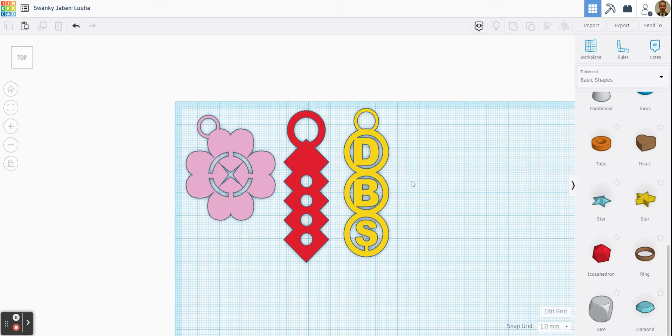So as you can see, I've got three designs that I've created. They're all very different. This one actually uses hearts, which can be found here. I've copied it and rotated it around, joined it together. This one uses the cube, the box here - again I've just changed the shape and rotated it. And this one uses circles, which is the tube here, and I've joined those together.

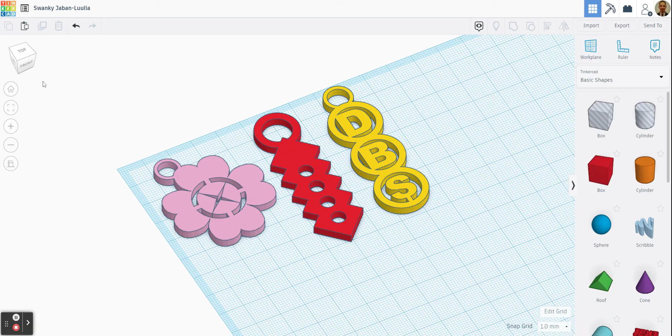And I've also, with this one, gone into a different menu in here, text and numbers, and found some letters that I can use. So before we get started, I'm just going to cover a couple of really important points when we are creating our keyring.

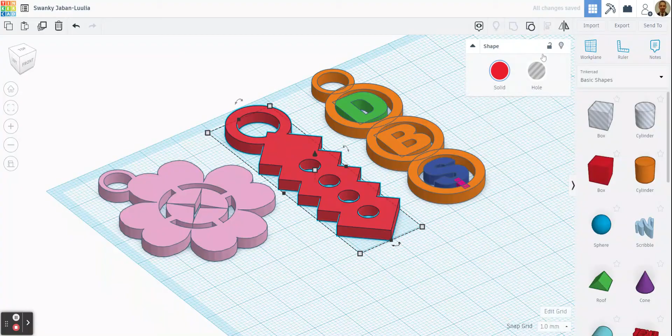The first point is that if you look, everything is the same level. What I mean by that - let's say if I just click this one and ungroup it, and ungroup it again, you can see all the parts to the keyring. Let's just hide these so we don't get distracted. You can see all the parts of the keyring, so I've got my D here - if I just drop that back, and all the letters as well.

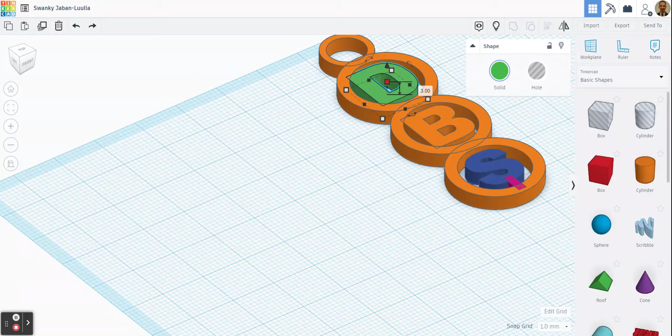Now the important thing is everything is the same level. So for example, if I just raise this up a little bit, this is 3mm, you can see by the number 3 there. If I raise that a little bit, and zoom in, you can see we have this area here that's lifted up.

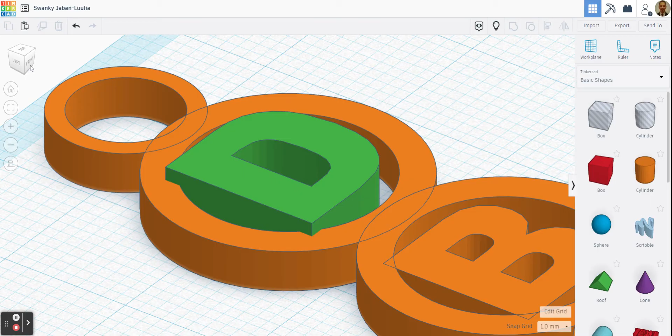Now that is really important because if your designs are left like this, with this raised area, when we send it to the laser cutter, it will see that as an edge from the top. The laser beam will come down here, and come down here, and cut out here, going all the way across. What will happen is your D will fall out.

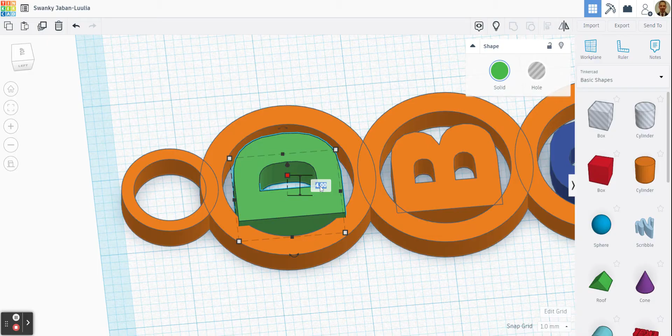Now I want to show you the difference. So if I put that to 3, which is the same level as the orange circle it's in, now when we look - I call this glitching. When it's the same level, you get this little glitch, like it's glitching. That's a really important thing to look for when designing to laser cut - it means it's on the same level.

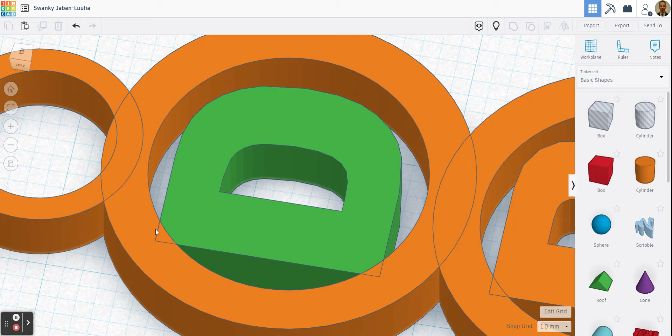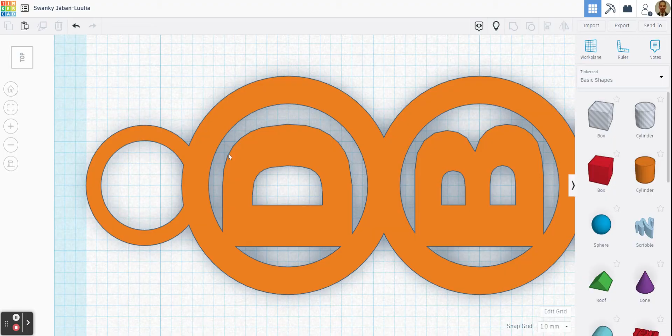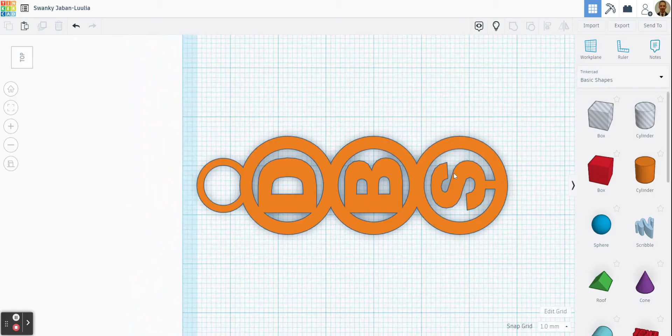When it's on the same level, when you come to merge it all together - we've done this in the previous lesson using the group tool - you'll notice that from the top, if the laser beam came down here, it'll stop there and go back up. This would mean your letter D would stay in the right place because it's attached to this circular ring here. If you look at all this, imagine the laser beam going around all these parts, and you'll be left with the letters in the correct place.

So let's bring everything else back and show that on everything else as well. If we have a quick look at the pink hearts - imagine the laser beam cutting the outside shape, and you can see that everything here would be kept together.

Now this one's quite interesting because when I created this, if I undo it, you can see I had to add these red pieces. Because if I didn't add those red pieces, since these are separate pieces - again you can see it's glitching, meaning it's the same level - if these red pieces weren't here and it laser cut it, I would be left with a hole in the middle; this middle piece would have fallen out. So I had to create these little pieces to attach the middle to the outside.

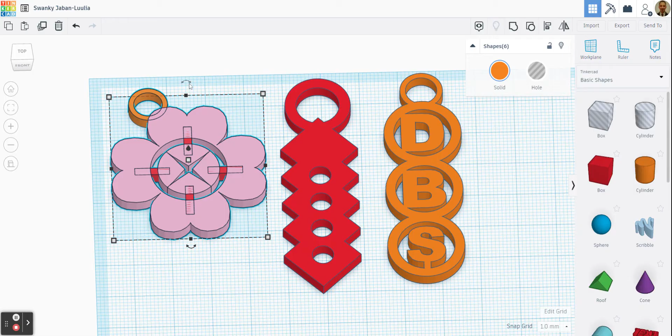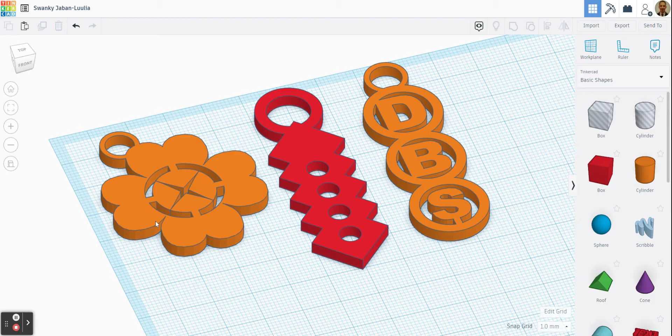But I'll cover that more in the demonstration I'm going to do next. So there's some important points you need to look at. Now another important thing is to make sure your total height for these keyrings is 3mm. So all these, if I click this, it's 3, 3, and 3. The reason why it's 3 is because the plastic called acrylic that you'll be cutting is 3mm thickness, so this is exactly to scale as you would be doing it in real life.

Another thing to take note of is when I zoom in like this full screen, it looks really big. When I zoom out, they look smaller. Now, what you need to do is count the squares. Here I can see 1, 2, 3, 4, 5, 6, 7.

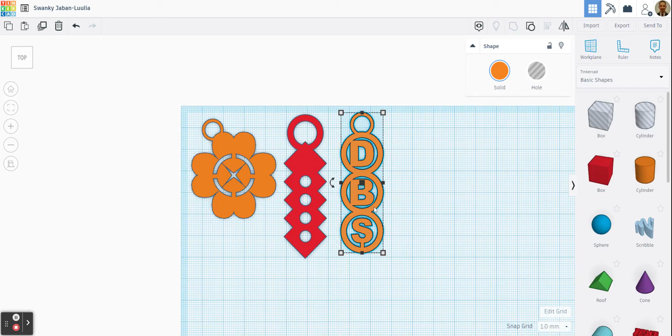So each of these squares is a centimetre. So this keyring is 7 centimetres long by, I would say, maybe 2 centimetres wide. If I move it to there, you can see it's two boxes, 1, 2. So you need to keep an eye on how big and how small things are. It's very easy in Tinkercad to create things that you think look big on the screen, but when you actually laser cut it, it is very small.

What you can do if you want to make things bigger or smaller is you can click this button here, and you can increase this. So it's 6.5 centimeters high, and it is 2 centimeters wide, so it's 20 millimeters. If I was to make that double the size, if I was to make it 40 wide, I'll just click that and type in 40, like that. And then of course that changed the proportion. It doesn't look as good now, so just undo that.

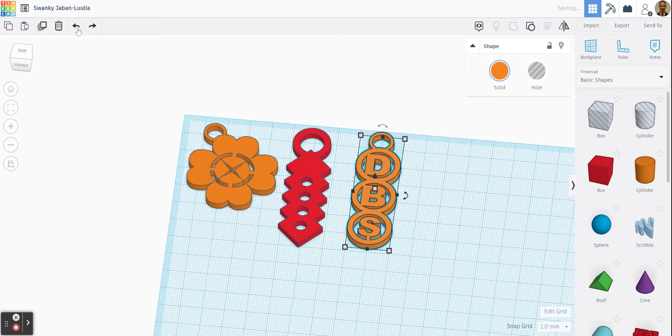So again, when you are designing your keyring, please make sure you take note of how big things are. You know how big a keyring should be. If you are unsure, just grab your ruler, have a look at it, and then work out what is the ideal size that you think.

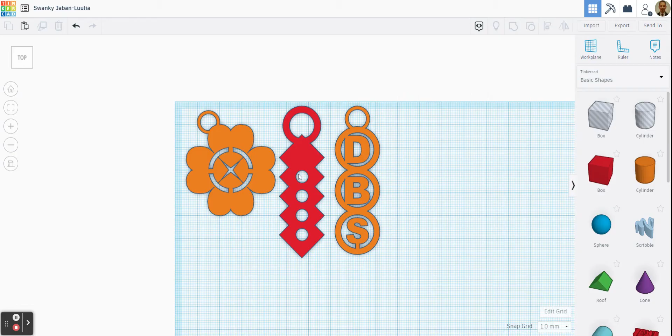Right, what we'll do is we'll show you how we create this one, the red one in the middle, and then we'll show you some other techniques to possibly help you create the other ones.

So if I want to create this one, the first thing I do is bring in the box. Now, when you're creating your keyring, only use shapes that have flat tops. So things like the box, the cylinder, don't use the sphere, don't use the cone, don't use the rounded roof, don't use a half sphere. Polygon's good. Don't use a torus, tube, heart, star, don't use this star, only flat tops, don't use this ring.

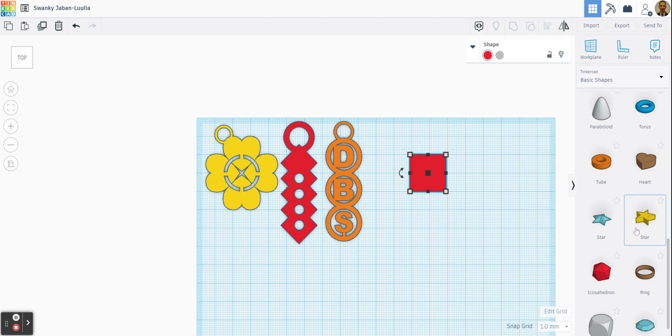If we were 3D printing, these would be fine, but because laser cutting only cuts things in 2 dimensions, it means it can only cut surfaces that are flat on the top. So don't be tempted to use this star and expect your keyring to look like that, because we're going to put a flat piece of plastic in the laser cutter and you will not get this. If we were 3D printing it, it would print to this shape. So just be mindful of that as well. Only use shapes with a flat top.

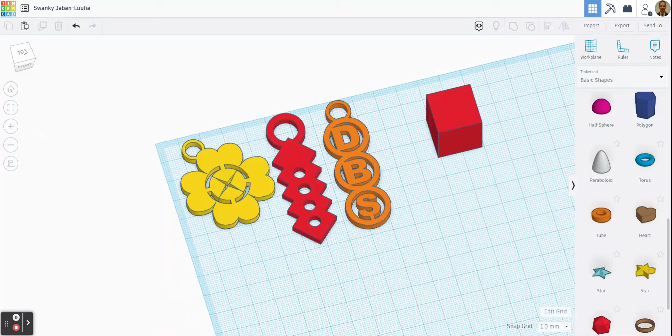All right, first thing I'm going to do is go into a view that you guys will be in when you start. The best thing to do, I would say, to begin with is go to the top view, like that, and then click this button here. So work in this view. Top, and then click this.

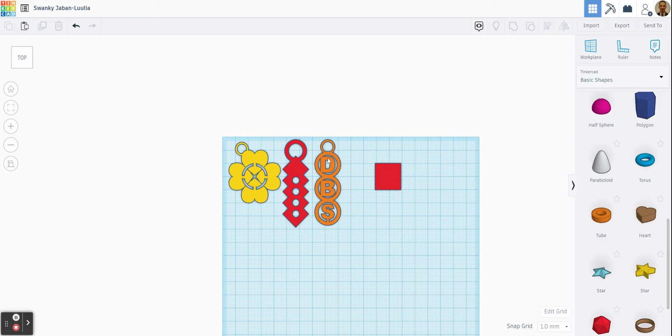Then you need to start looking at your shape. For this one, what I did was I made it a little bit smaller. To do that, the easiest way is to hold down the shift key and pull the corner in. The reason why I hold the shift key, if I don't, I can do this. If I hold the shift key, it keeps in proportion, like that. Now, another point is that when I make things smaller, it also alters the height. So once you made it to the right size, you have to do this visually. That looks fine to me.

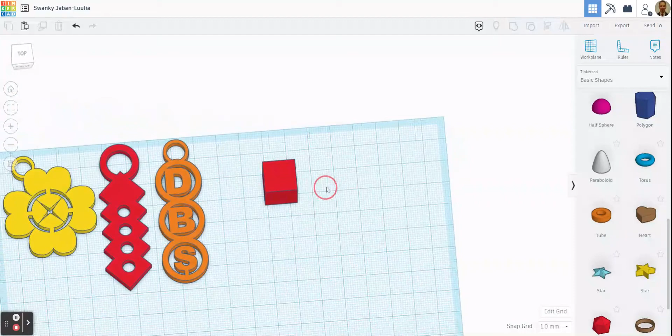Just go into the 3D view. So turn your view like this, click it, and then change the height to 3 millimeters. Then you know that's the correct height. And you can go back to your top view.

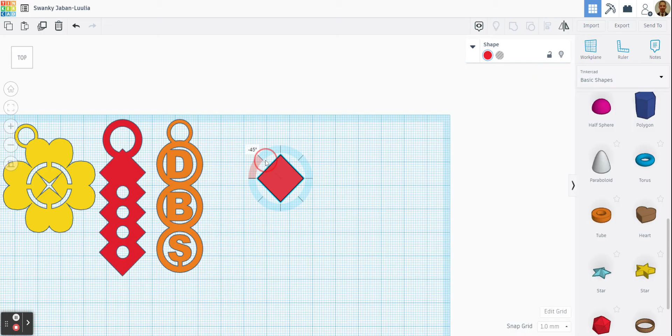Now what you do is you can get this and rotate it. Again, the rotate tool gives you quite free movement. But if you hold the shift key, it locks into 45, 90, etc. So this is a lot easier to use because it gives you nice presets. I want that sort of diamond shape, so I'm going to move it 45 degrees, then I'll let go.

So now I want to create another one. To do that, all I do is go up to here and press duplicate. Remember from the previous video that when you duplicate something, it appears on top. So all you have to do is press the down arrow key to make it appear.

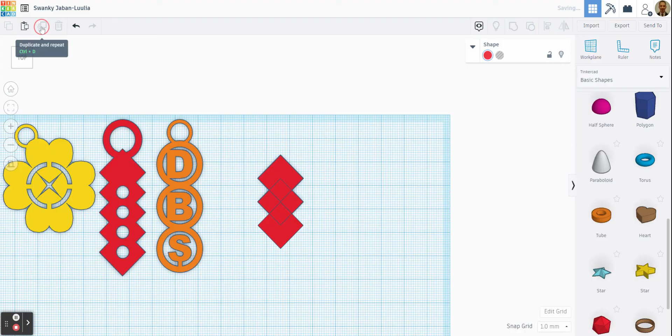Now what's nice about this is you find where you want to have it, maybe there. Then if you press duplicate again without deselecting this, just leave that selected. If you press duplicate, it'll repeat it in the same place. So you can create quite a nice pattern if you wanted to, like that.

So let's put 4 in. Okay, now I've got this pattern here. What I'm going to do is I'm going to just click them all, and then I'm going to group them. So now it is one shape.

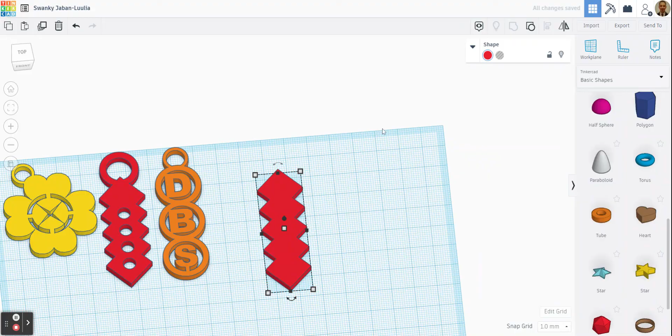From there, what you could do, you could click this, press duplicate again, and rotate it. You could say, right, I want to rotate that, and then let go. From that, you've got a really interesting shape. So you can see that from a box, tilting it, copying it, then rotating it, you've got an interesting shape. So this looks cool to me.

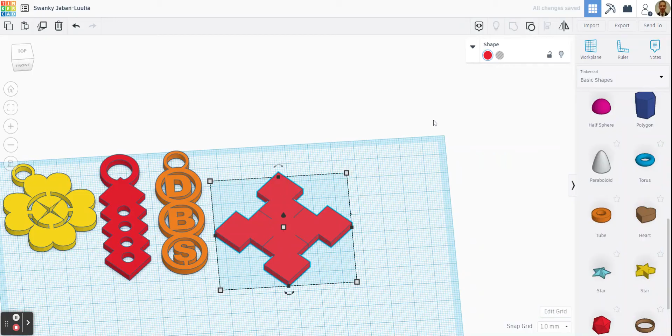So I'm going to again get that and group it to get rid of the lines. Okay, so now that is fine. I've got these little lines here, but I think they're okay because they might be like a nice design feature. So that's looking okay, looks interesting.

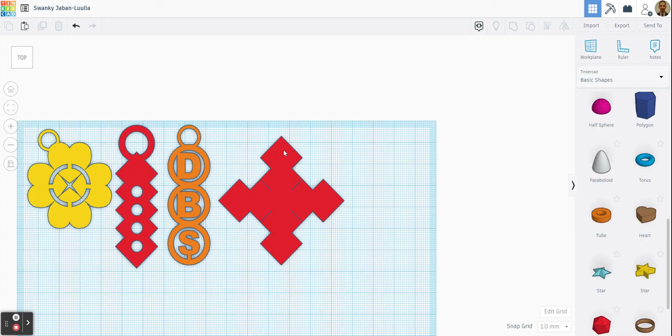So what I'm going to do now is I'm going to put some features on here. I'm going to take some shapes away from this shape to make it look interesting. So I think what we'll do to begin with is maybe put some circles, take some circles away.

So I'm going to get the cylinder. What I'm going to do is, when I always get the cylinder, I click this and I increase the sides to make it a perfect circle. Then I'm going to resize, so again I'm going to hold down the shift key and make it smaller. Okay, that looks good to me.

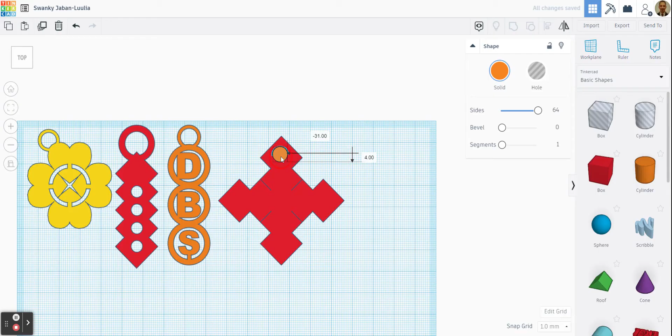And I'm going to put this one on top of here. Now, what I want to do is I want to get this in the center of my shape. Now I can do it by eye, but it's a little bit awkward. So what I'm going to do is I'm going to just highlight my shape.

And then I'm going to press this button here, align. Now align's really good, it's really useful, because if I want to align this circle through the center, I just click this black dot. And now I can see it's in the center. So this point here will be the center of here. So it aligns nicely. If I click that, it'll put it right in the center, but I don't want to do that.

Okay, I want to have it back where it was, which was there. So we've got that in the right place.

Just check it's aligned. So what I want to do is I want to again duplicate that, and I want to use my down arrow key to put it on the opposite side, roughly about the same place. Okay, and then what I will do is I want these two to be also there and there.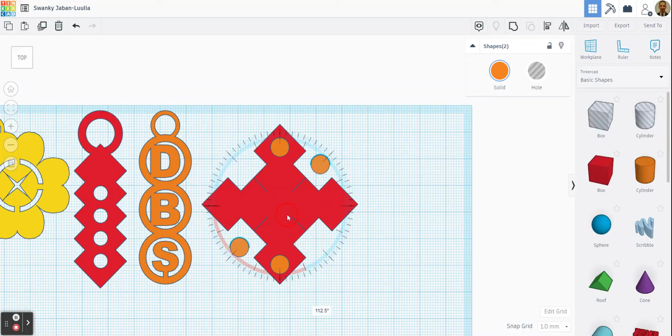So I click this one, I hold down the shift key and click the other one. So that's both things selected now. I then press duplicate, and then if I use the rotate tool, it should allow me to rotate it by 90 degrees. So they are now in the right place.

Now I want to take them away, and currently as they stand, if I do that, I can see that they won't be taken away, they'll be added. So I want to take these away, so I'm going to click that one, hold down shift, click that one, still holding shift, click that one.

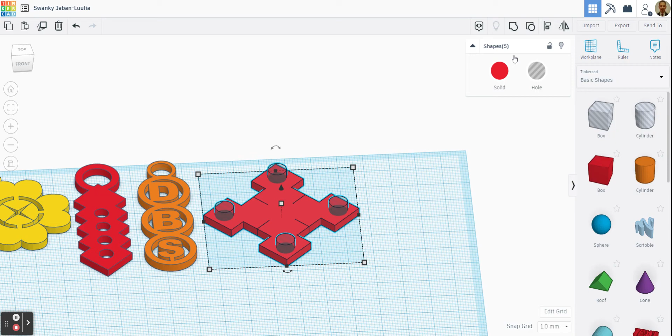Okay, so then I'm going to change them to a hole. All right, now they're all ready. And the last thing then is to do this and then to take it away. So then we get a hole taken out of there. So it's looking interesting now.

So in this center area, I think I'm going to take something away as well, just to add a bit more feature. Anything interesting down here? No, I think I might just use the cylinder like this. Okay, and again, like I said before, increase the sides.

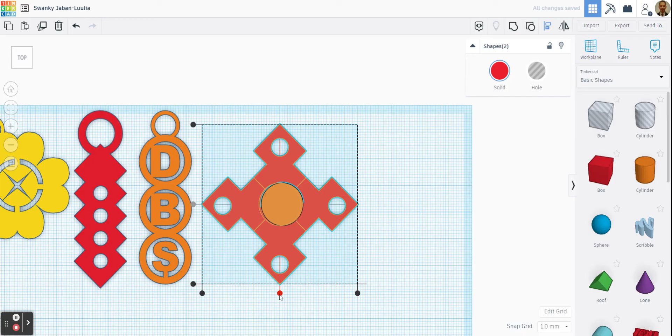And I'm going to put this in the center. Same as before, I can put it sort of randomly where I want to put it. Okay, then if I highlight this and use my align tool, if I click this left dot, it hasn't moved because it's already in the right place. And if I click this one, it'll move slightly, so that now is perfectly in the center.

Okay, so again I want to remove it, so I click it, I press the hole. Then I have to select both things, and then we take them away.

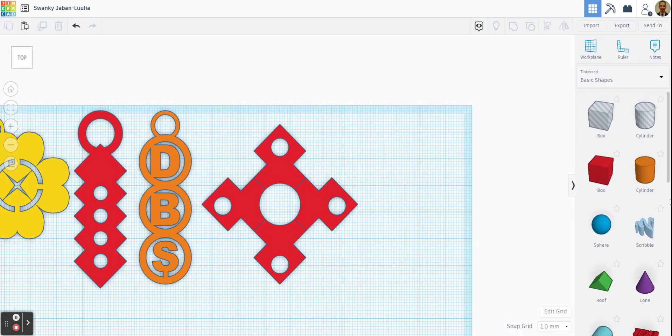Okay, so now we have our hole in the middle, that's my interesting shape. What I could do is put something inside there, so let's go for text and numbers, let's go for my initial R.

Okay, and I want to put this R in the middle here. Now this R has to touch on the sides, it can't just float in the middle like this, because when we laser cut it, you will lose your letter.

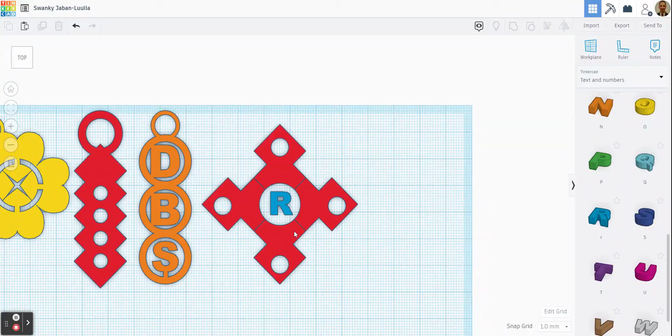So there's a couple of ways we can do this. Let's zoom into it, click this and have a look closer to make life easier. Okay, so get really accurate here. So I could grab it and hold down Shift and stretch it so it touches the shape.

Okay, that's touching now, but we need to make it in the center. So I click this, and again, the align tool. I want that in the center there, and that in the center there. Okay, so that's touching there, that's touching there, that's touching there.

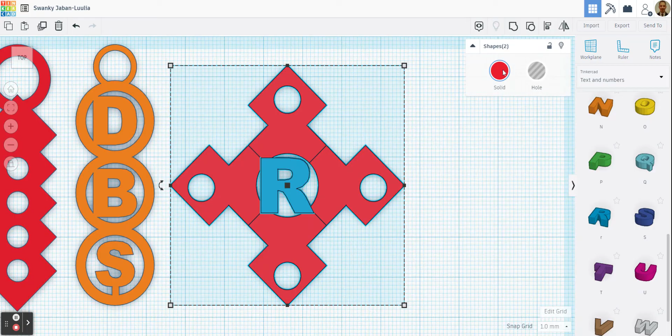But what you need to do, if you just did this, it'll be wrong. Remember I said at the start of the video, the laser cutter would cut this out. And if you tilt at an angle, you can see that is not correct. That would cause a problem. So let's just undo that.

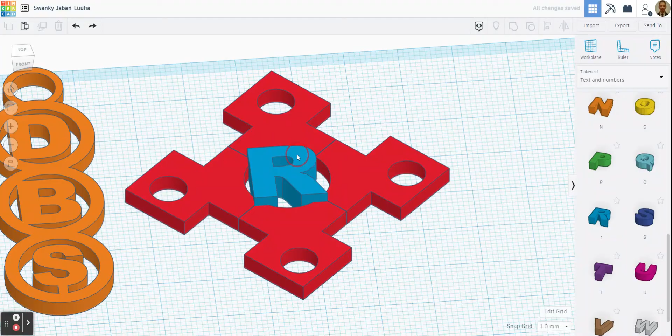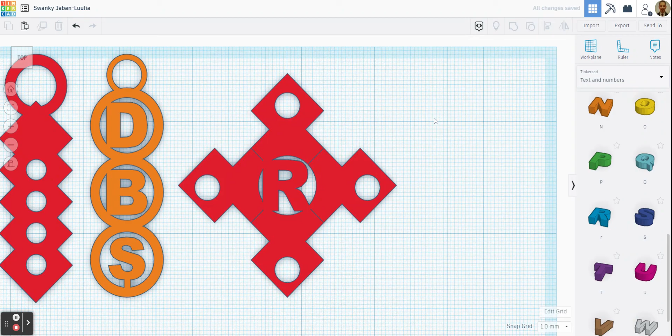So what we need to do is change this, click that, 3. Remember I said about that glitch? We've got the glitch, which means it is the same height. So again, we're going to join it. Okay, so that is now joined onto here, like so. There we go.

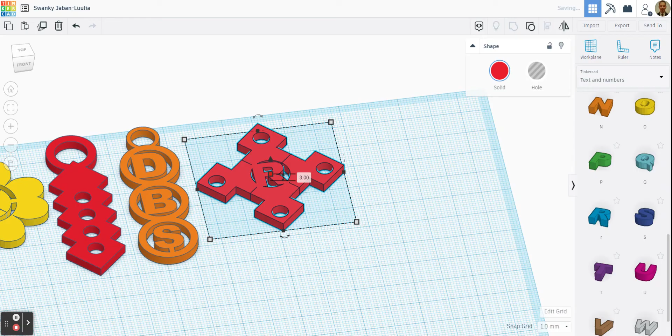So if we just have a quick zoom in, have a look. Okay, that's quite big actually, so I'm going to reduce the size a little bit, let's shrink it down. Okay, so 5 centimeters, so 50, which is millimeters, by 50. And the last thing I'll do is check that it's still 3, it's probably changed a little bit. So when I shrink it down smaller, it also gets thinner. So again, 3. Okay, one last thing to do.

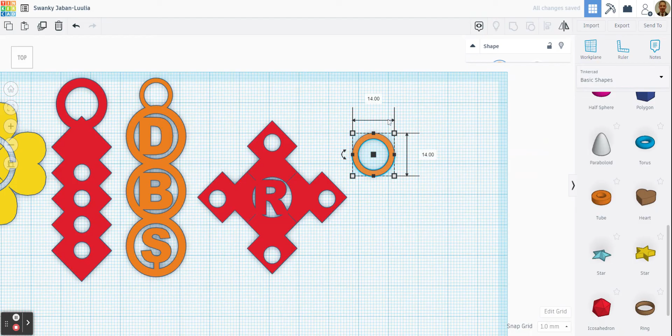So the last thing to do now is go back into our menu here and go into basic shapes, and I want to go to tube. Okay, so sides, increase those, and make this a little bit smaller. The tube is very useful because it's where we can clip our keyring into. You can put it at the top there, you can put it at the edge, and put it at the top here, like so. And again, you'll need to check it's the same level, which is not.

So quick fix, click that, and press 3. Okay, almost there, so last thing we do is then we join it. Okay, so that's good, so you can see now that's another keyring created.

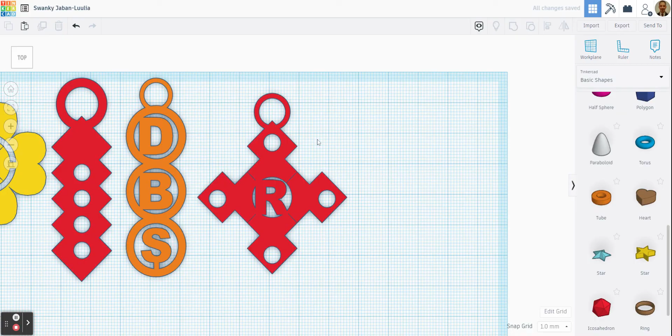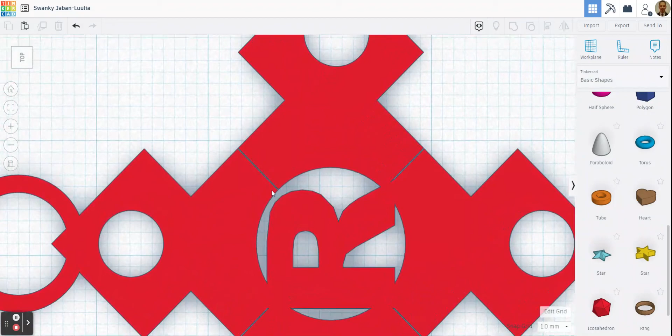What I'm going to do is have a last little check. Okay, everything is the same level, everything is the same level. Now I'm a little bit concerned about these little lines here, because what that potentially could do, you can see now zoomed in, it's a split line. So what that might do, that would probably weaken the design because the laser would cut down here and cut in here.

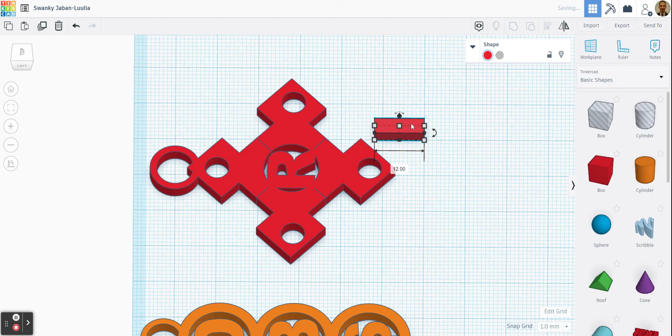And also, a quick fix for this, really easy, is just to get the box, make it a little bit smaller. I'm going to change that to 3 because that's how tall my design is. Make it a little bit small like that. Go to the top, and I'm just going to place these in spaces where the gaps are. So put one there, I'm going to rotate it so it fits parallel. Okay, it's glitching, which is good.

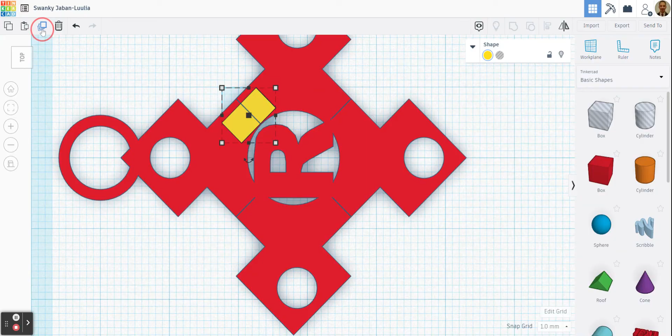Okay, duplicate that one, move it down, and rotate it so it covers that gap. It doesn't have to cover all the line. Duplicate that, move that one to like here. Again, they're all glitching, which means they're the same level.

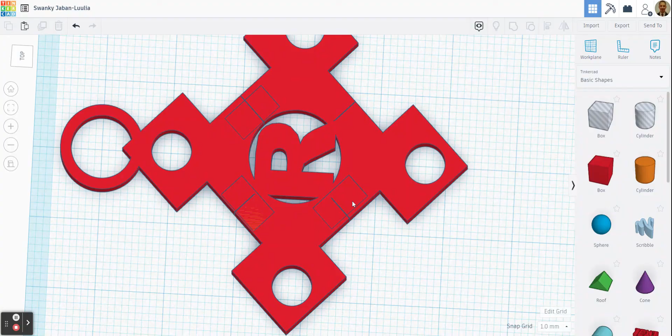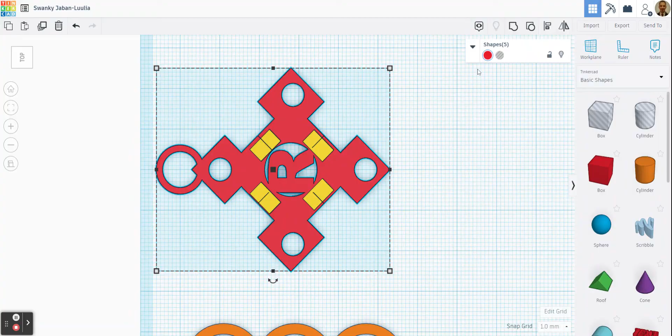It's good you've seen this because you can see how easy it is to fix things and the importance of getting everything so it's the same level. This one, again, we'll rotate that one. So that's just going to plug those gaps. Let's highlight over there and join it all together. And now you'll see they've gone, these little marks won't matter. It was the fact that everything else needed to be. Let's go this round.

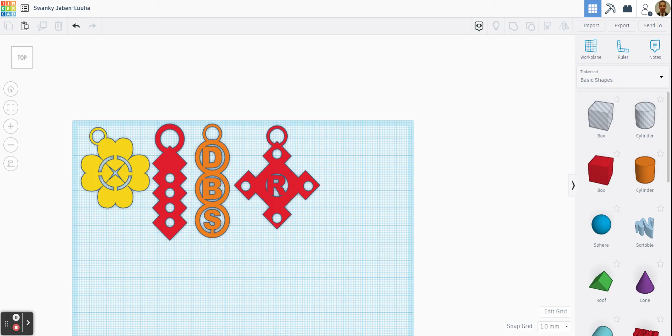Okay, so that's the keyring done. So you've seen how we group things, how we can rotate things, how we take things away. But it's really important, if you look at all these, you can see that they all are the same level and they are all joined together. There's nothing at a different height, and also they are all a sensible size for a keyring.